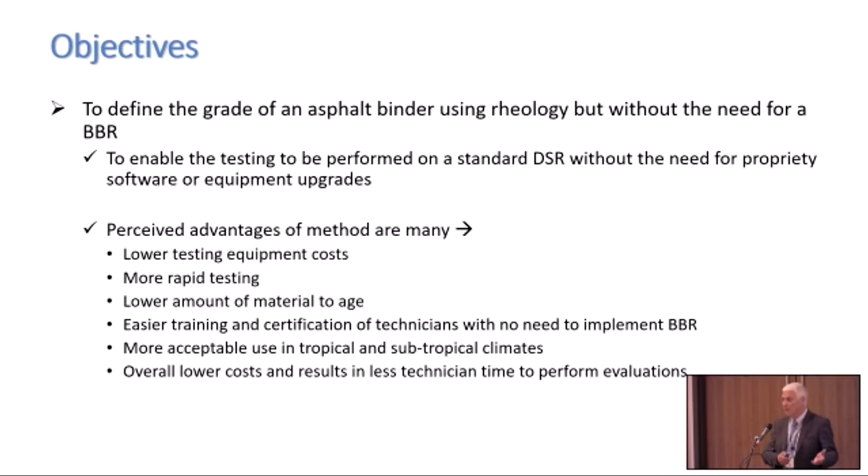So basically what I'm trying to do is advocate that we don't necessarily need to use a BBR to test our binders. Think about why we have a BBR. The BBR was developed 35 years ago plus, during the SHRP program. Back then I didn't have a cell phone - now we all have these advanced computers in our hands. Back then we were working with 286 machines.

I was sitting in the lab with John Reed here. We both were sitting at the University of Nottingham, working with old-style computers, what we'd call old-style now. I remember we used to have 3 megabytes of memory on a computer, and that was big. So things have changed. We need to think about the change in instrumentation and what we need to do.

The drive to change the specification and get away from the BBR has been something the industry's been looking at. We have the iCCL method that was being developed, incremental creep loading, but that has a customized and proprietary database. You have to have an online link for that. John will tell you that if you're working with Shell or other oil companies, they probably really don't want you to have a live link to go and analyze your binder data. So maybe that's not the best solution.

4mm rheology has been developed here. Other people have been looking at it, but there's a bias in that. I've done results and studies with 4mm, and I see a bias—there's no standardized procedure yet. Texas has its method, introduced recently, for doing tests in a DSR at low temperatures, but you need a chiller with that machine and a more advanced rheometer.

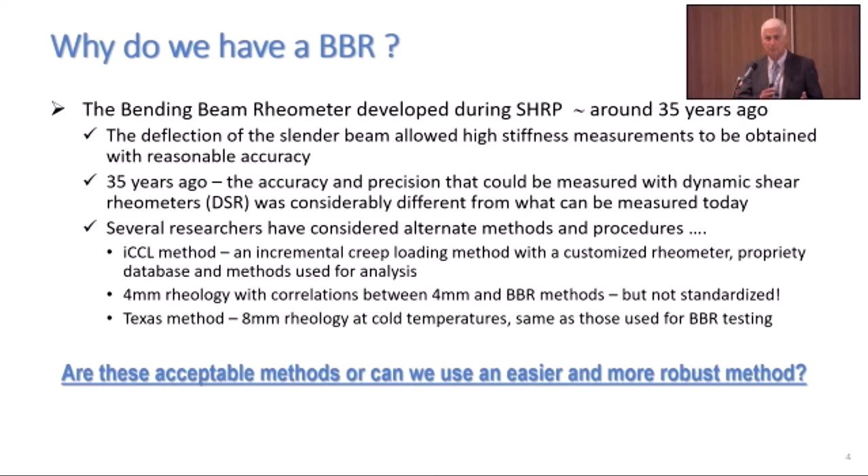My objective here is to talk about what methods we can look at for trying to classify the low temperature properties, or I really should say the high stiffness properties, of binder with a more robust method. That's really the objective we're looking at.

So think about what we're trying to do. The stiffness in a bending beam rheometer, 300 megapascals, we have an M value of 0.3—they've been related to low temperature cracking. And then we have this other parameter, delta Tc, which is considered a durability parameter. Delta Tc defines the shape of the master curve, and we know we have other parameters that give us better definition of shape, things like the R value.

Pavel Kriz introduced the phase angle at a constant modulus. We can look at the crossover modulus—my favorite out of those is the phase angle at a constant modulus. S and M define point parameters measured at 60 seconds, and we use 10 degrees above the PG low temperature grade. That was something introduced during SHRP. It doesn't quite hold true, but I'll show you that in a minute.

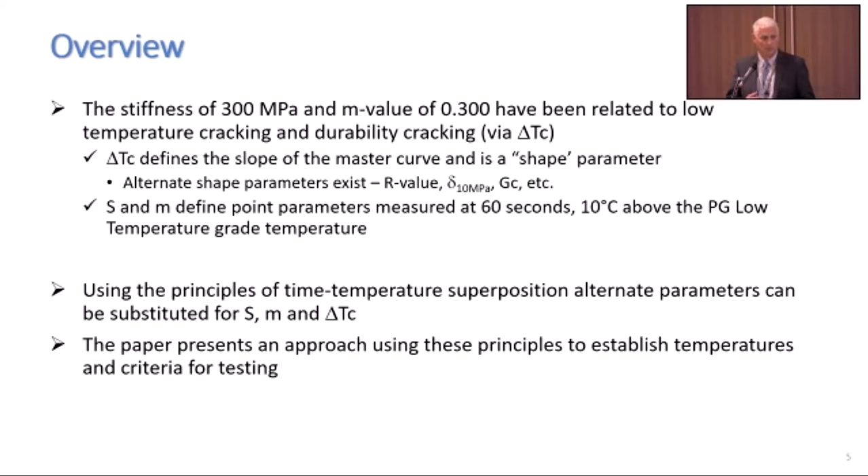We can use the principles of time-temperature superposition to get alternate parameters for the S and M and the delta Tc, and that's what I'm going to show you in the work we're doing here.

So we published this in 2014 at CTAA, and this shows the interconversion between the G star and the S of T, and the phase angle and M. Let's see if this works here. So we have S of T, and this is the conversion to G star. If you have a stiffness of 100, you can come across and you've got your corresponding G star there.

The G star of 100 is where your 300 megapascals is. On the M value, it's a little more scattered, but this is the M value—if you're here at 0.3, that comes across to about 27 degrees. So that's the interconversions that you have.

They're fairly robust. If you look at other interconversions published in the industry, work done in France back in '91, or actually '99, but it goes right back to the early 90s—they looked at a temperature where the phase angle is 27 degrees and said that's related to cold temperature cracking. Work being done in Canada, in Ontario, looks at 30 degrees. So what we're doing here isn't in isolation—other folks are also looking at this temperature with a phase angle.

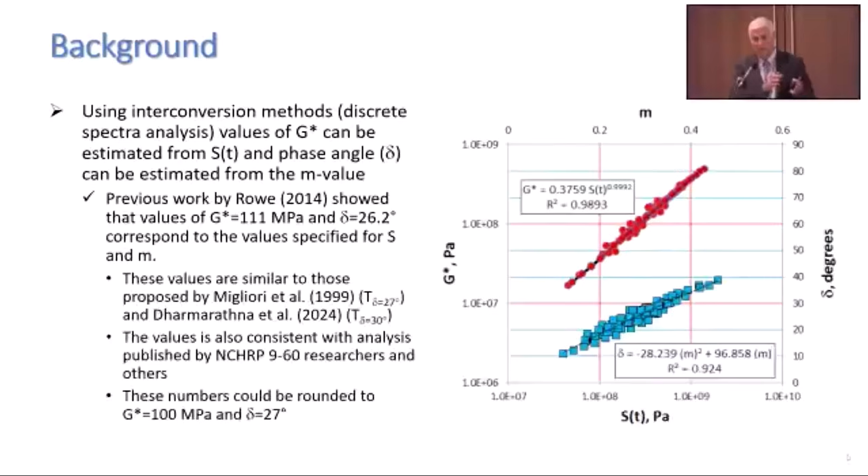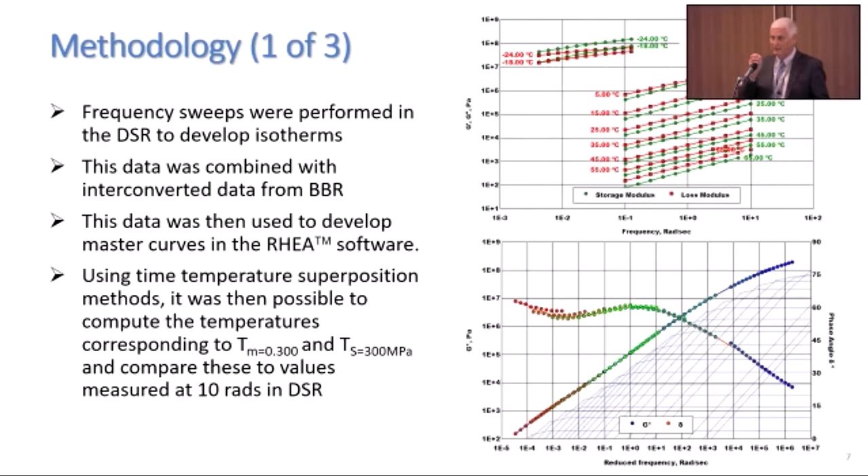So that's your interconversion. The methodology we've basically followed is we've run these full master curves—we've looked at BBR and DSR master curves. We've combined these in our software and calculated, using this analysis, the temperature that would correspond to the M value of 0.3 and the temperature where the stiffness is 300 megapascals. So we're determining the temperature of those numbers, and then determining the temperature of the equivalent interconverted numbers at 10 radians a second.

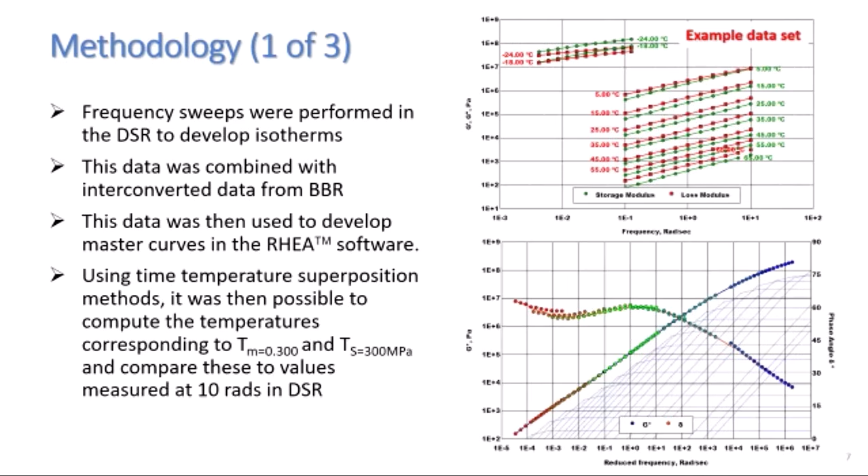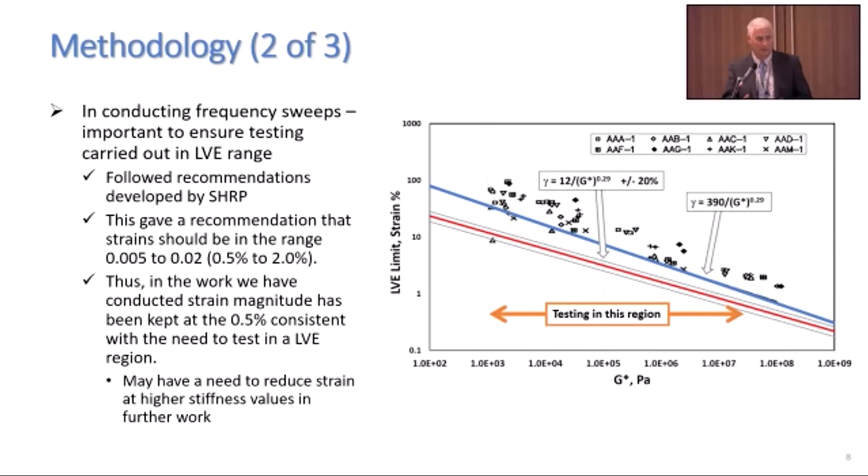We've been very careful in our work to make sure that we work in the linear viscoelastic region. If you test materials at higher strain levels, for example ASTM D7175 talks about strain levels of 1%, 10%, and 12%. You have to drop those strain levels because you're measuring at higher stiffnesses. So we're working down at 0.5% strain, lower strain levels, just to make sure we're in the linear viscoelastic region.

That's an important consideration. The other thing we've done is we have the method where we've worked with master curves, and we've also developed a simplified procedure. Basically, we're taking a test at a certain temperature using 10 radians a second. We're measuring G star and the phase angle, then we drop the temperature, go through an isothermal drop, and measure G star and phase angle again. This is a bit like your normal testing for the intermediate temperature. We've done this for a bunch of binders where we've dropped the temperature and gotten the G star and phase angle, and then we can compute a whole load of parameters.

We've used this for both the intermediate parameters and looking also at the low temperature parameters. If you did this for the whole set, it takes about a 2-hour testing window, but if you only want the low temperature part and the high stiffness part, that drops down to maybe half an hour. It really depends how far you want to go in terms of getting the data out. So this is a simplified procedure.

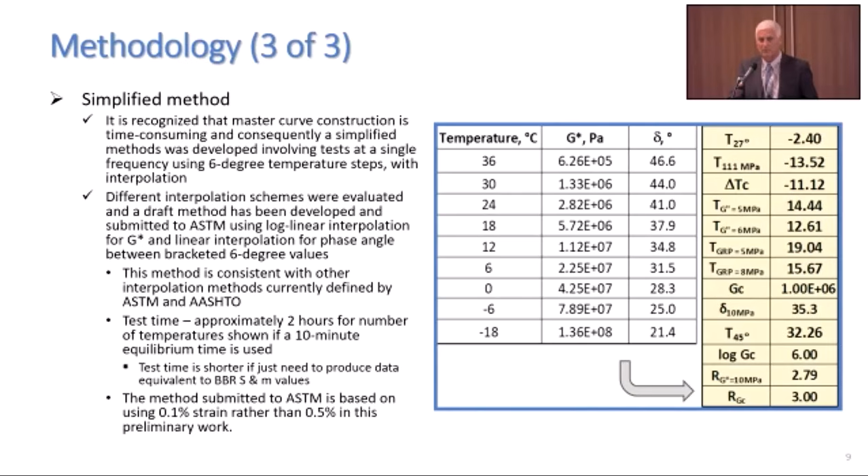This procedure has been submitted to ASTM and is in the ASTM draft procedure. It's been through a ballot, and Wes Cooper is looking at this with the Asphalt Institute. So how do the results compare?

These are some graphs now that show the data sets in terms of the temperatures. On this side, we have the temperature of the M value from the bending beam rheometer, and the temperature that corresponds to the phase angle of 27 degrees. You can see that there's a very good correlation between those plots.

We looked at some different parameters. We looked at the temperature where the phase angle is 30 degrees, because that's what they're doing in Canada. The 27 degrees gives you a better correlation, so we prefer that one. Then we looked at the G star interconversions, and we get a very similar interconversion whether we use 111 or whether we use 100. You're talking about the third decimal point in the R squared in terms of how those data points compare. So we've gone along with using 111 and 27 as our numbers to adopt from this interconversion.

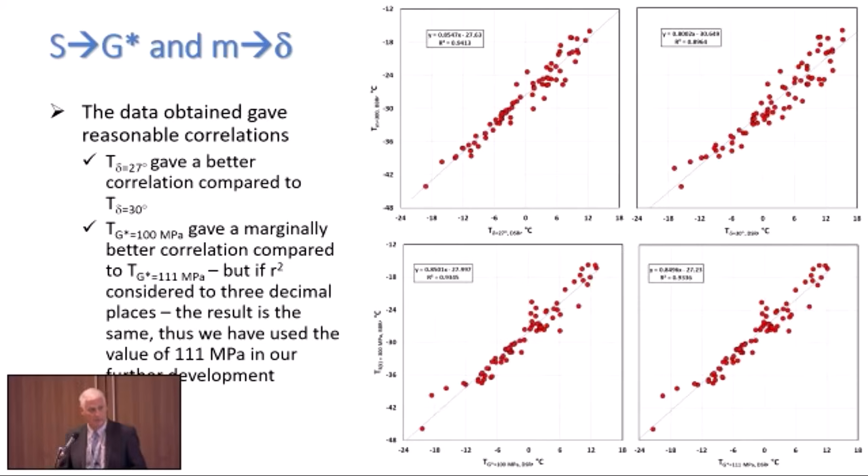Delta TC correlation is not quite so good. Delta TC is a little bit problematic in the industry as a whole. The work being done by the Asphalt Institute is probably going to suggest that we don't move forward with delta TC and we use Pavel Kriz's approach instead. The correlation isn't too bad, but when you're measuring delta TC, you're measuring a slope of a very flat part of the curve, so any small error is magnified. The comment here is that industry recognizes delta TC is a poor shape parameter and is most likely to be replaced with the phase angle at a constant modulus.

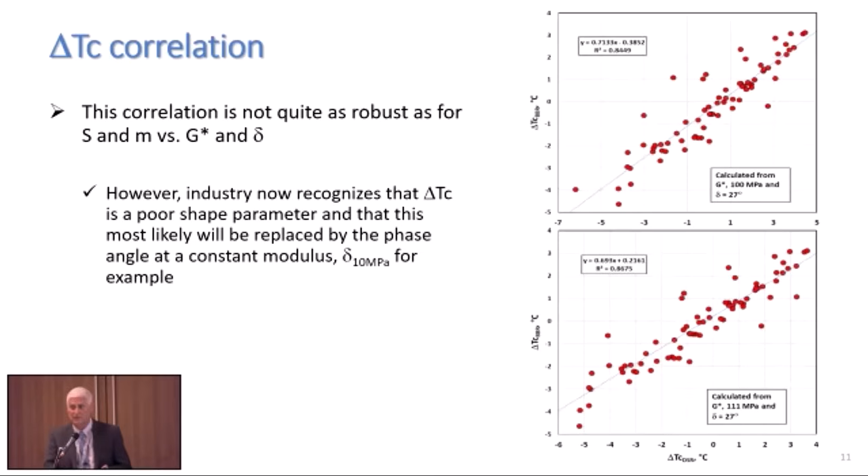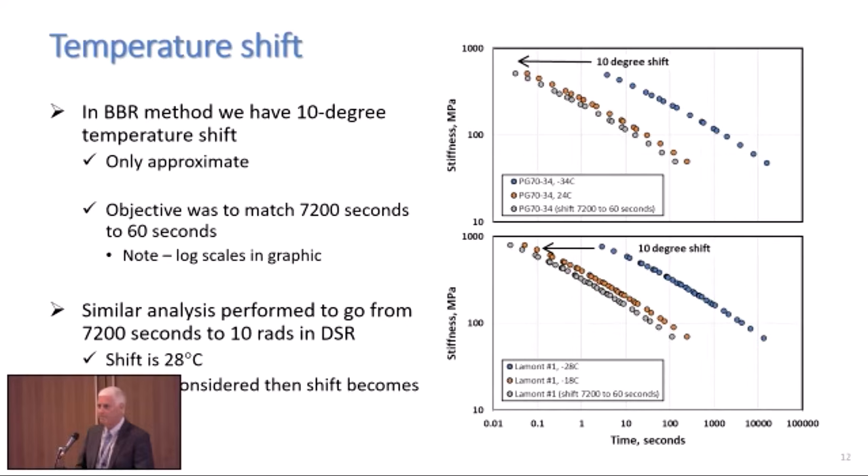I've slipped forward, I wanted to show you this one. We're going to use time temperature superposition in terms of trying to fix test temperatures. One of the things that's poorly documented is the temperature shift of this 10 degrees C that we have in the bending beam rheometer, and this shows you that it basically doesn't quite work. The 10 degree shift is a little bit off. It really is giving you something which is not quite 300 megapascals, but is closer to, say, 150 megapascals when you do the shift. This was also documented in a TRB paper around about 2013, 2014.

So this is not the only work on that, but it doesn't quite work in terms of the shift. If we do a similar analysis to the 10 degree shift that they did for the bending beam rheometer, to go from 7,200 seconds to 10 radians per second, our shift is 28 degrees.

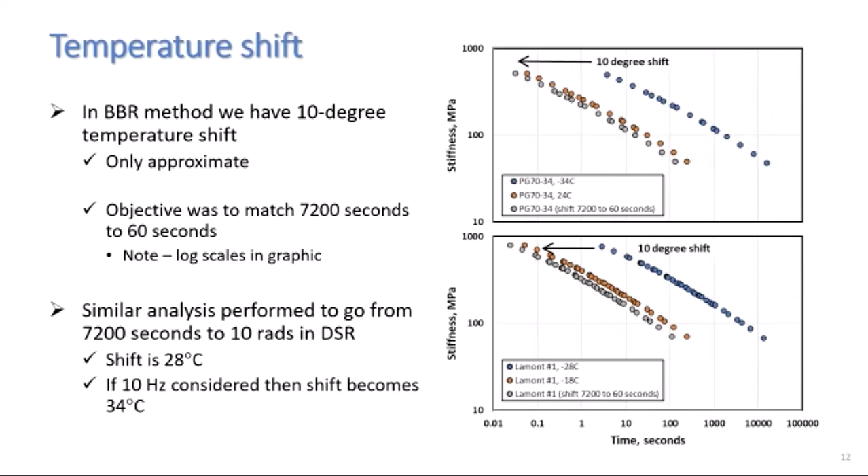And we've done this in a fairly robust way. The initial 10 degree shift was in a less robust way. If you do 10 hertz, that shift becomes 34 degrees. So some of the folks in Europe prefer to test at 10 hertz. I don't really have a strong feeling whether you test at 10 hertz or 10 rads. It's really a question of what that shift is going to be, and that shift is relatively consistent.

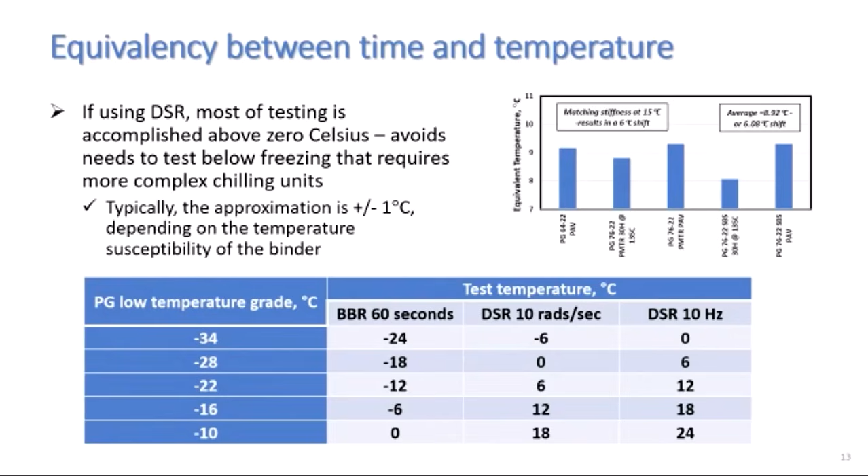We looked at some binders from Arizona, looking at 5 binders at different levels of modification, some conventional binders, just to see how that shift varies going from 10 rads to 10 hertz. And there's a 6 degree shift there. If you look at the variation, this was going from 15 degrees C to 9 degrees C, and you can see there's a little scatter, but you're all within a degree in terms of that scatter. So it's not too bad. I think it's reasonable enough, especially when we consider what we were founding this on was the original shift of 10 degrees C.

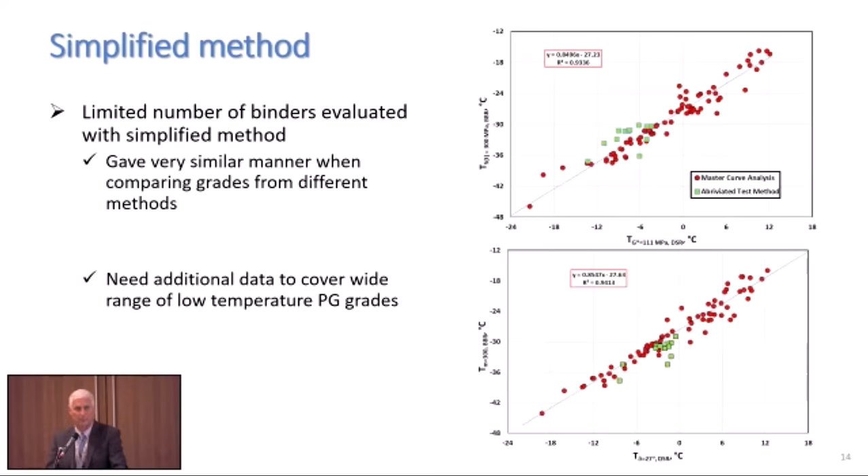In terms of looking at the two methods, the analysis from the full frequency sweep method versus the simplified method, we've only got a limited number of data points here. I can't really put an R squared through the green data points. I could put a root mean square error there, but doing an R squared would make no sense at all. But these are some binders that come from New England, part of a study we're doing there, and they're reasonably close in terms of the grade evaluations, looking at the simplified method versus a full master curve method. So the result from this work says you don't need to do a full master curve, you don't need to have my fancy software. You can do it with a much simplified method, running a standard script in a DSR to get the numbers. And this is very important because folks want a simplified method that they can run in the lab.

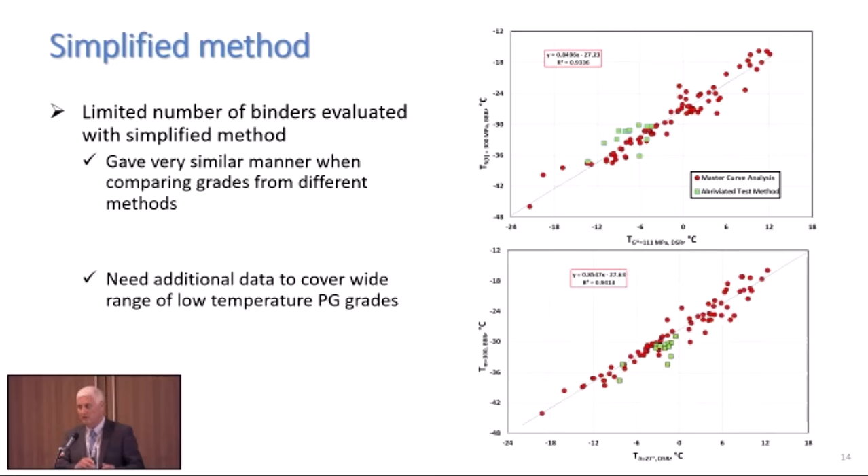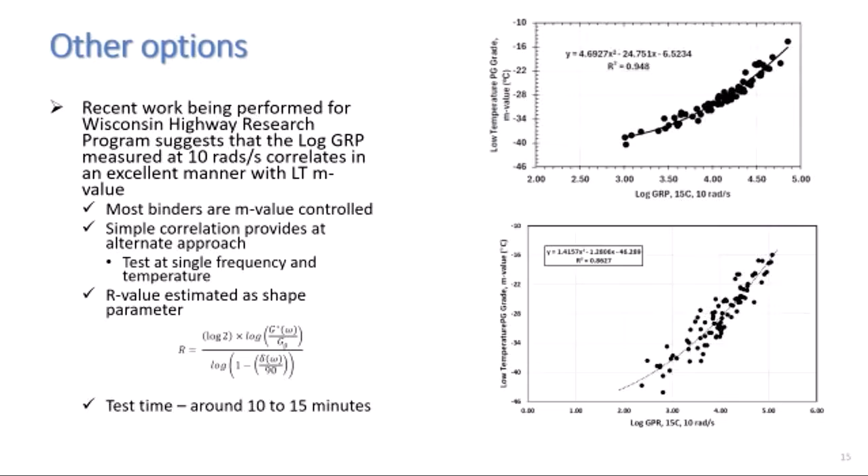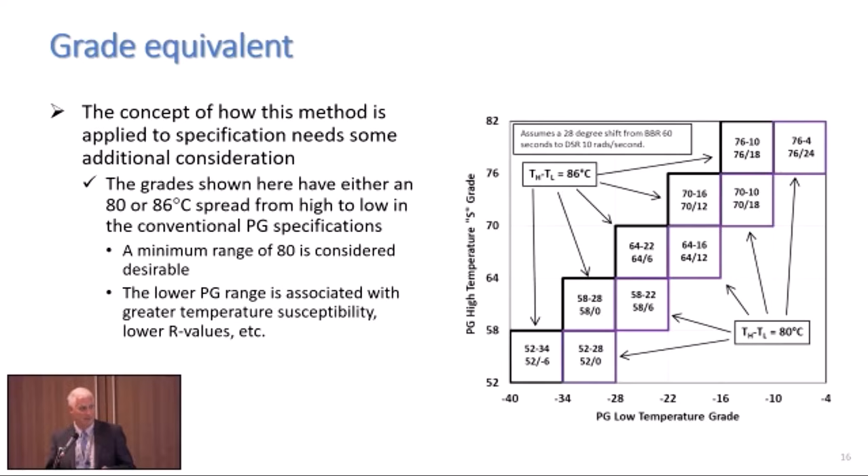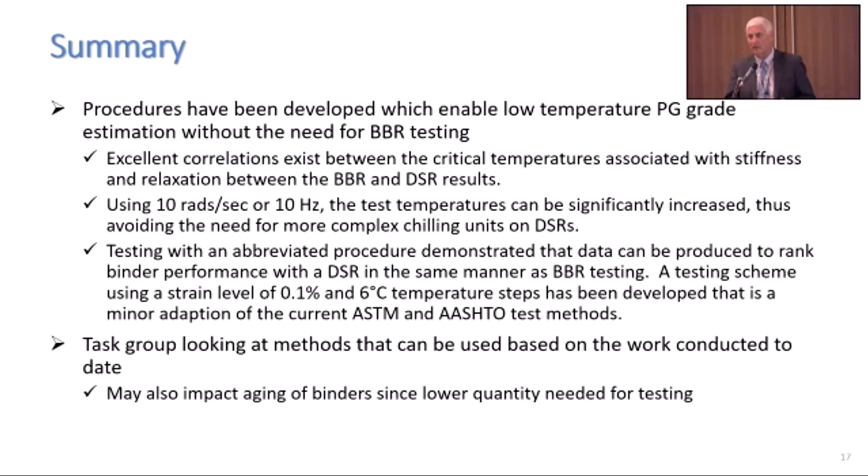The other thing I should mention is we're using a similar procedure in the roofing space as well. This type of analysis has also been looked at for roofing grade binders as well as paving grade binders. This may also impact the amount of binder that we need to age, so we can also have the opportunity to look at some alternate aging procedures.